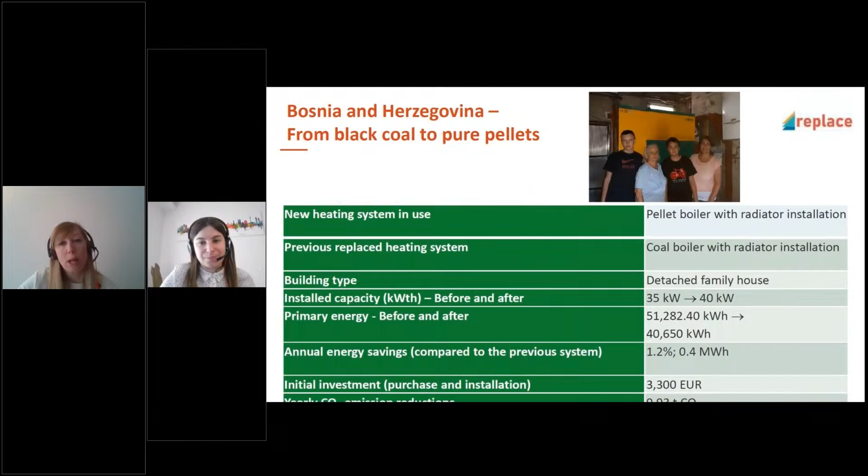More recently, BuildUp has opened the opportunity to distinguished experts in the field to share their knowledge in front of our cameras in our BuildUp Expert Talks.

The BuildUp portal shares daily the most relevant events in the field of energy efficiency and renewable energy, but we also participate actively in many European events around the year, such as EPB Center and REHVA conferences, H2020 DRIVE and construction events, Covenant of Mayors, and so on, with the aim of further disseminating the results and helping to create high-quality media content. The BuildUp portal is updated daily, reaching around 120 new items each month, including news, events, publications, articles, video content, and many more content.

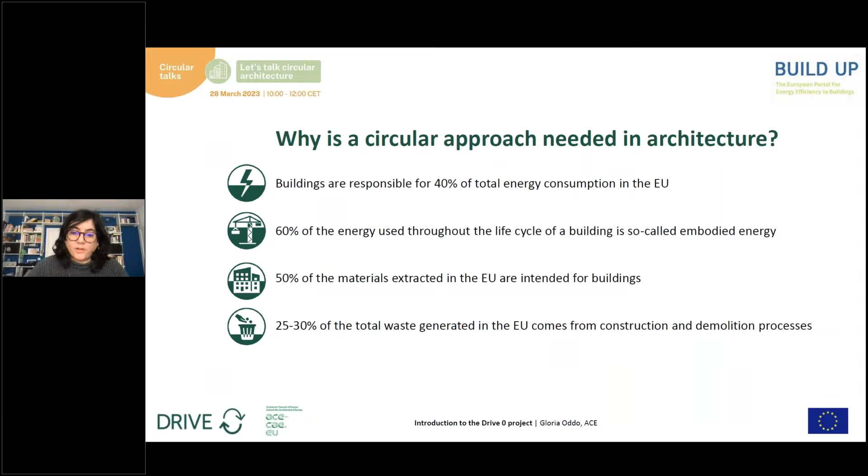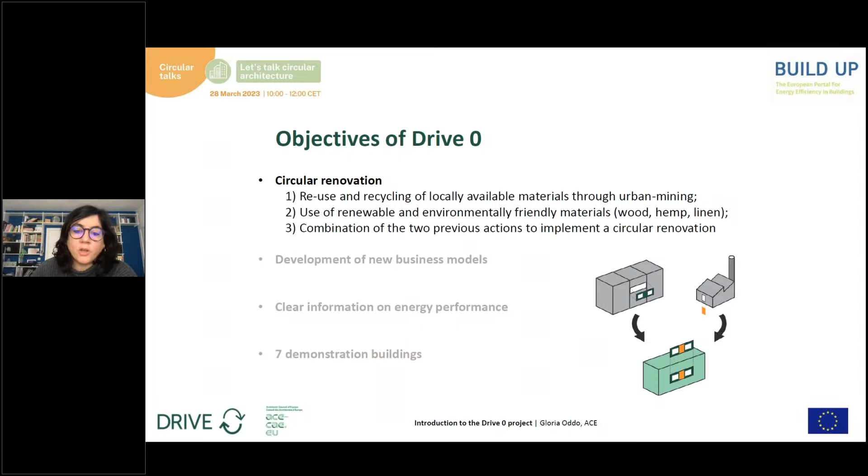Objectives of Drive Zero: first is circular renovation of buildings, meaning we reuse or recycle local available materials through urban mining. In parallel, there is the use of renewable and environmentally friendly materials. Then the two actions are combined to implement a circular renovation.

Development of new business models - we're going to see this later on in more detail with my colleague, Professor Elettra Agliardi from the University of Bologna.

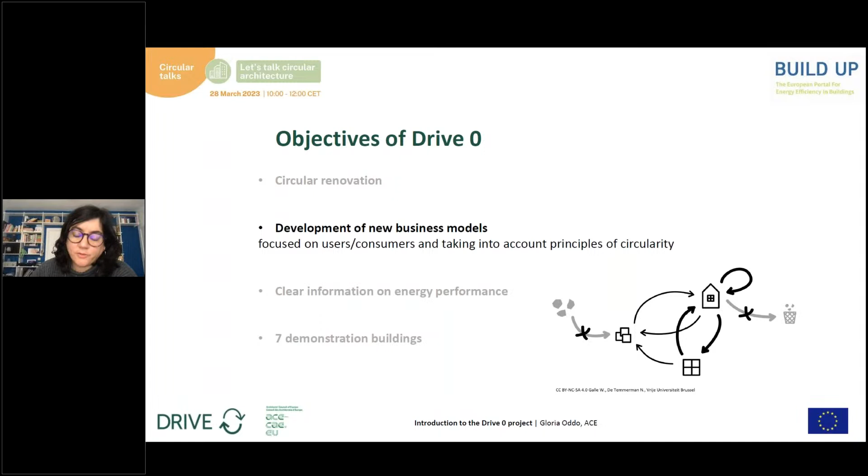Clear information on energy performance, because once the circular renovation has taken place, we need to transmit this information to the users, the occupants of the building themselves. The buildings are also an objective of the project, and they are all located in the 7 pilot countries of Drive Zero: Estonia, Greece, Ireland, Italy, the Netherlands, Slovenia, and Spain.

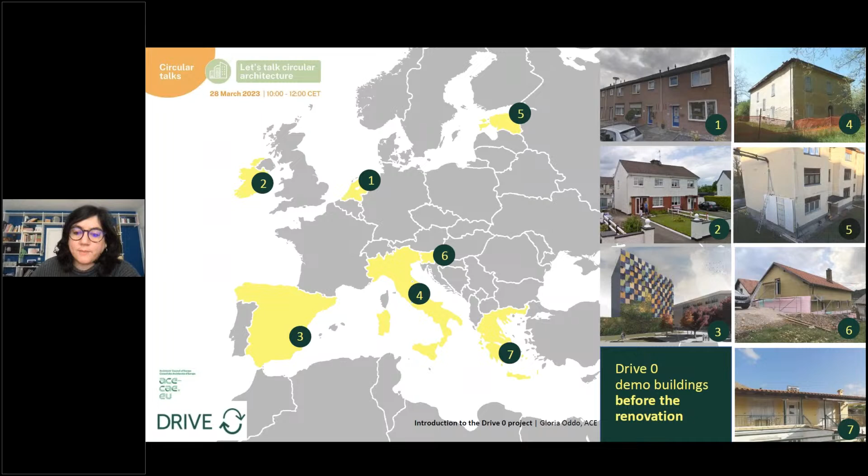This is how the buildings look before the renovation. As a consortium, we tried to pick buildings that represent a frequent typology in their own country. This was meant to ensure replicability of the technologies and of the research conducted in Drive Zero.

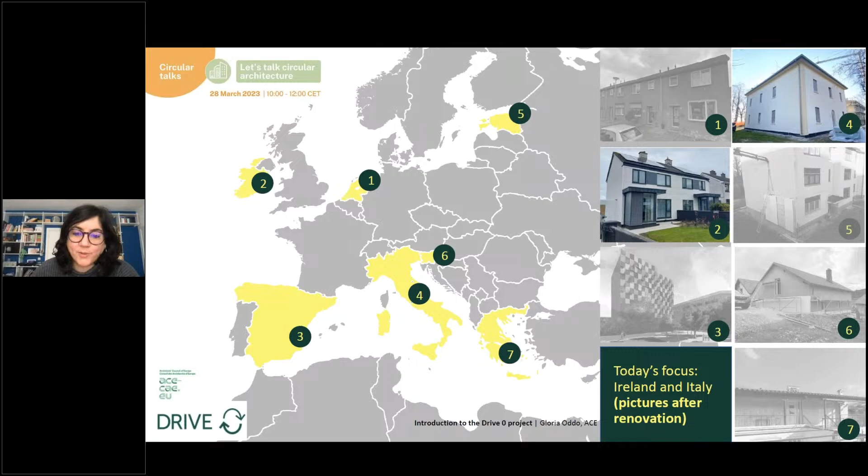Today's focus will be on Ireland, number 2, and Italy. Spoiler alert - this is how it looks already after the renovation. But my colleagues will explain to you more in detail the renovation process.

What about the other demos? They will be presented in the next webinars. As Julia said, this is the first of 3 webinars. The next one will be co-organized by University of Bologna and Housing Europe, and will focus on and be addressed to social housing providers, but of course everybody is welcome to join. We're going to present there the Dutch and the Estonian buildings.

More information will be available soon, but you can still check our website on Drive Zero. The third and last webinar of this series is co-organized by University of Bologna again, and the Property Owners Association. This will be on the 27th of April, where we're going to present the Spanish, Slovenian, and Greek demonstration buildings.

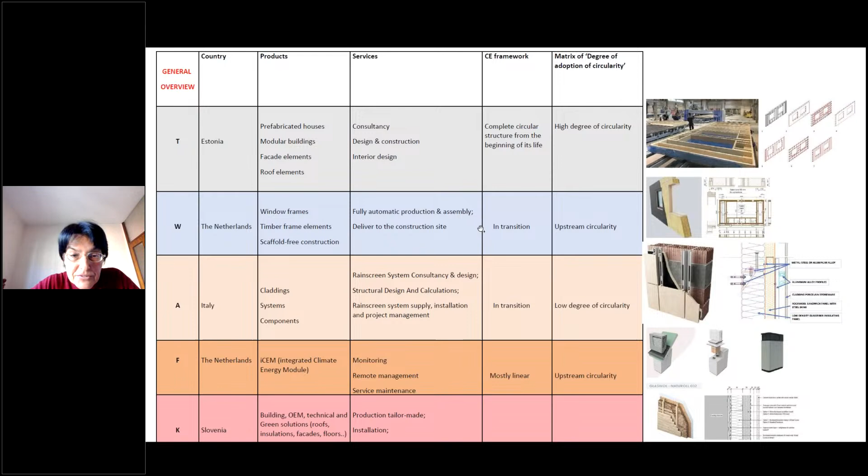Just to conclude briefly this part, the main takeaways of this preliminary part, which is relevant for most of the audience, which is architects or consultants in the eco-design process, is basically the following: you have to become aware in the design phase in particular, and therefore develop solutions which take into account the following aspects: how to introduce circular inputs, circular product service systems.

And how to exploit also the other important element of circularity in terms of lifetime extension, in terms of providing sharing platforms, and how to consider also the aspect related to products where value recovery is important, and therefore also how to use and, in particular, reuse waste and elaborate on this. And in particular also how to build new solutions in terms of shared ownership, and therefore considering more the use aspects, rather than the ownership aspect.

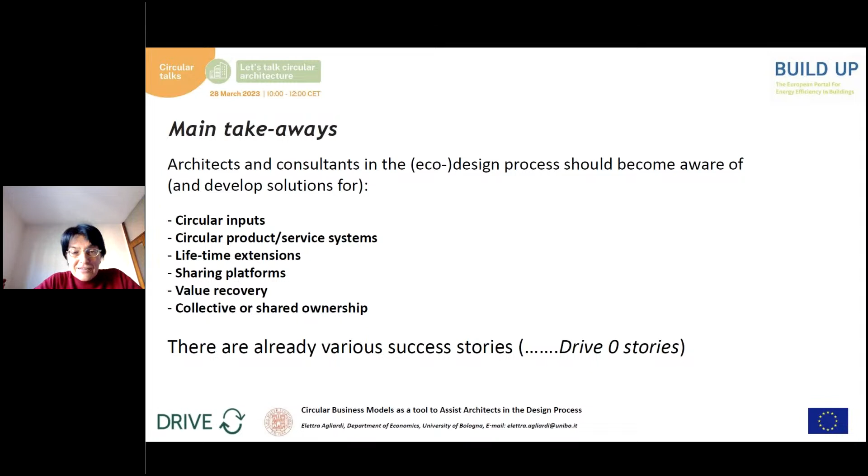And there are already various success stories, and of course we have successful stories also within Drive Zero. The Drive Zero successful stories would come immediately after my presentation. Thank you for your attention.

And let's go to Patrick. Daly, are you here? I'm here, yes, just waiting for when you want me to start. Yeah, go ahead, go ahead.

Great, hello everybody. So my name is Patrick Daly from Technological University Dublin, and I'm going to give you an overview of the Irish Demonstrator Project, which has just recently been completed.

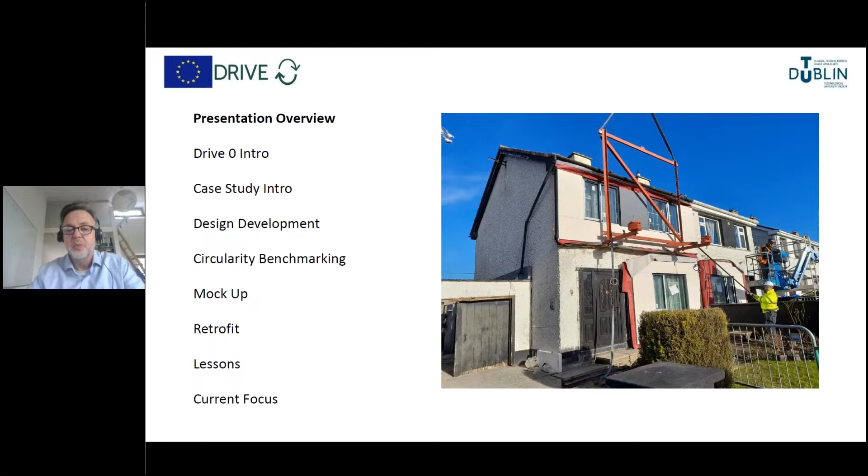So what I want to do is quickly skip through the Drive Zero intro since you've already been introduced to the project. I'll talk about the Irish case study, the design development, how circularity was benchmarked, the mock-up phase where we did preliminary testing of the circular wall panels, then go through the actual retrofit phase, and finish with a discussion of lessons learned.

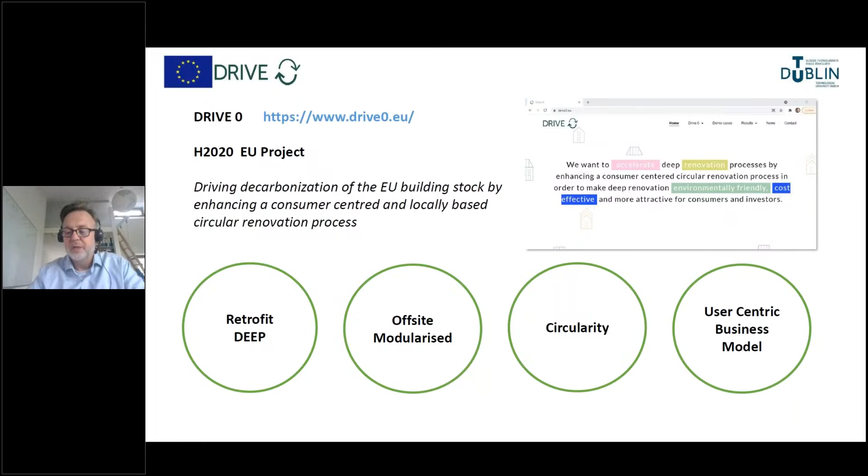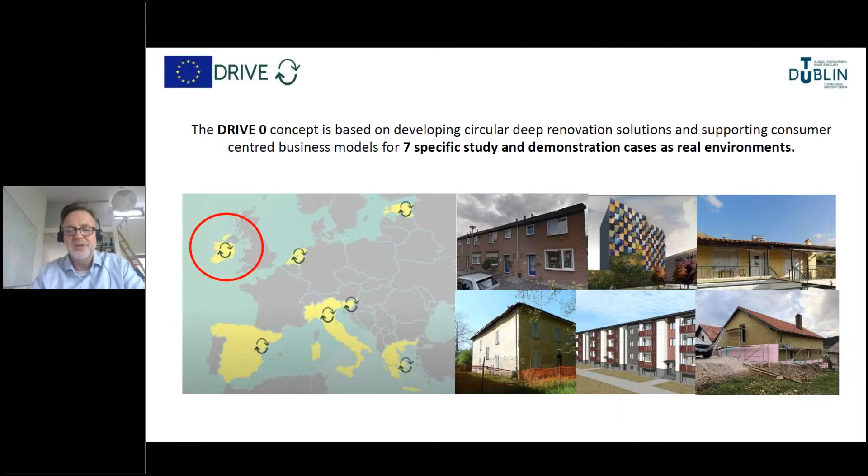Drive Zero is an EU project exploring circularity through modularized solutions. We are one of 7 consortium partners, the Irish partner on the western fringe of Europe. Our case study is in the center of Ireland: a 1970s construction, a typical semi-detached house, 3 bedrooms, in social housing owned by the local authority, or what you might call a municipality in Central Europe.

This is the demonstrator and our energy rating method. When originally constructed in the 1970s, it would have rated as a G, the lowest rating. It would have been heated with a solid fuel range cooker and an open fire, and it was uninsulated.

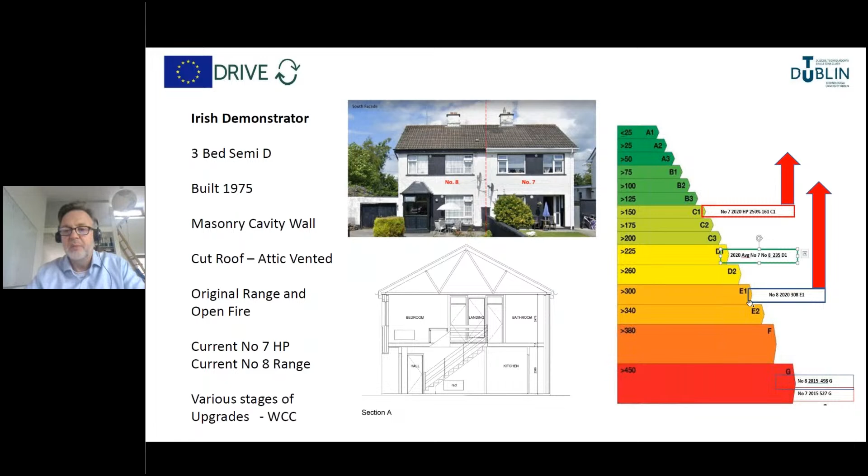In the interim before we started, the houses had some interventions. One property rated E1, with double glazing installed and some attic insulation. Another rated D1, with similar upgrades plus a modern heat pump fitted. So the houses were already partially retrofit, and we attempted to achieve a combined 65% improvement for both properties.

The measures we undertook included a fabric upgrade with a modularized system and a small extension, new heating systems, new energy efficient ventilation systems, renewable energy through photovoltaics, and new windows and doors. All combined to give us a 65% uplift.

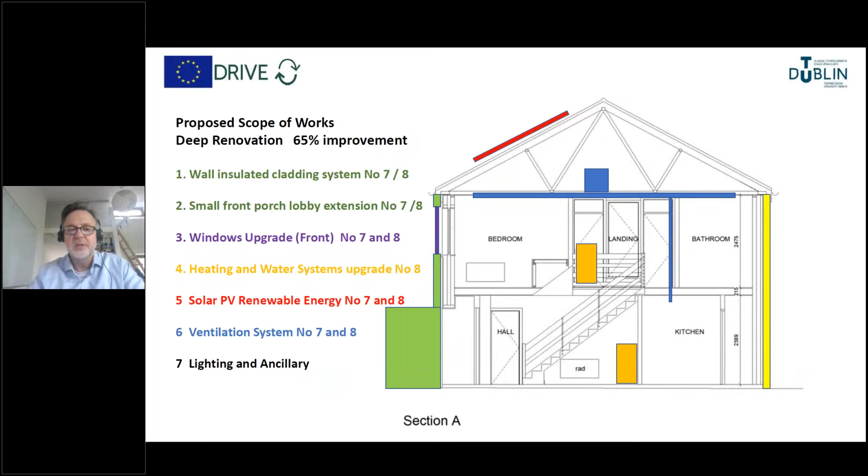Design concepts focused on how we would retrofit the wall facade. Due to the scale of the project and budget, we didn't feel it was feasible to do the roof, which had already been partially upgraded. So the main intervention in the demonstration was the modularized wall construction and the modularized circular extension pod.

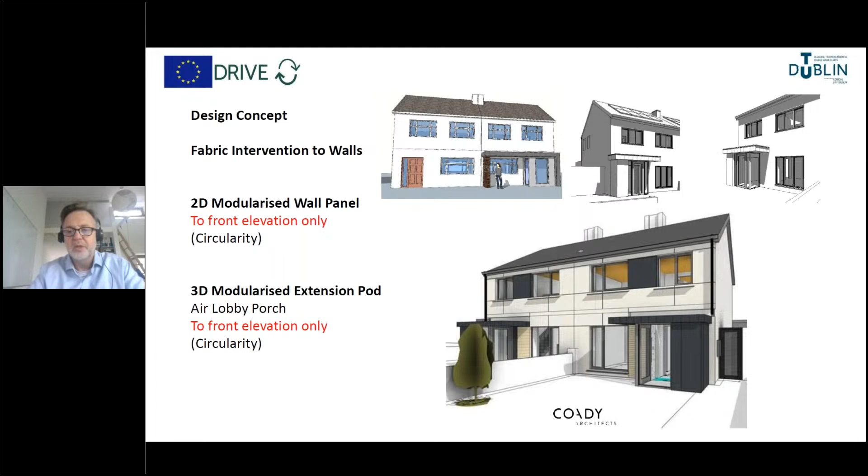Our partner was a conventional light gauge steel manufacturer with a system already used in construction in Ireland. We looked at how we could adapt this system into a wall cladding and modularized extension system, transitioning some of the plastic insulations to bio-based insulations, and looking at how we would connect and assemble the panels to the wall.

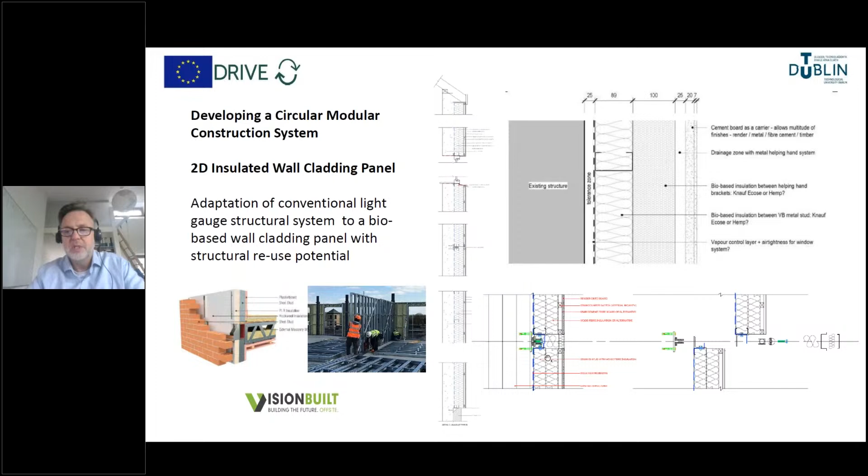These are some very early concept proposals and an initial concept build-up for the panel.

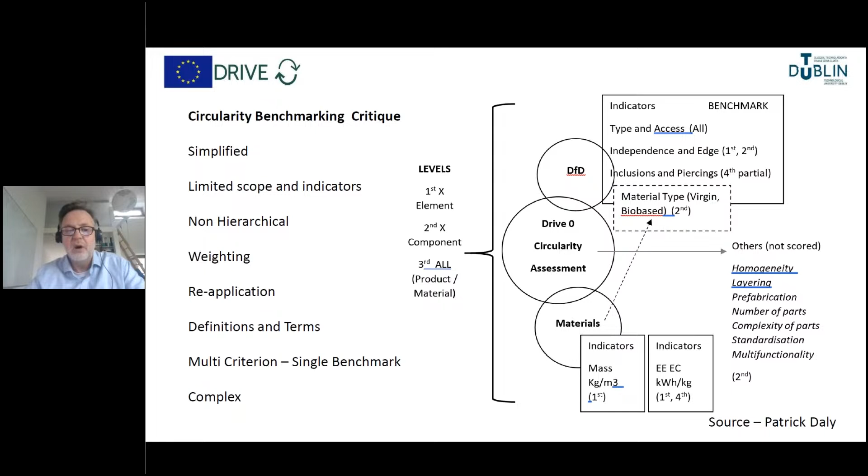A number of circularity assessments were done during the project, which were quite insightful and helped us develop the strategy. We also developed some criticisms of the simplification of that method, particularly that it wasn't always undertaken at different levels in the hierarchy. But it helped us develop our thinking about circularity, and in particular how important design for disassembly and material specification are to achieving circularity at construction level.

Out of that, we focused on a strategy where we would attempt to achieve full disassembly at all 3 levels in the building construction hierarchy.

At level 1, we wanted to ensure the prefabricated panels could be detached from the host walls in their entirety, so they could be reused in their entirety in another cladding or structural context, since they had structural capability, or be transported to a facility where they could be disassembled and disconnected in a structured environment.

At level 2, we wanted to ensure the main components making up the system - the wall panel, the window system, and the jointing sections - could all disconnect from each other and be reutilized with minimal impact.

At level 3, we wanted to ensure the panel system could be fully disassembled from all components and products and materials down to their base elements.

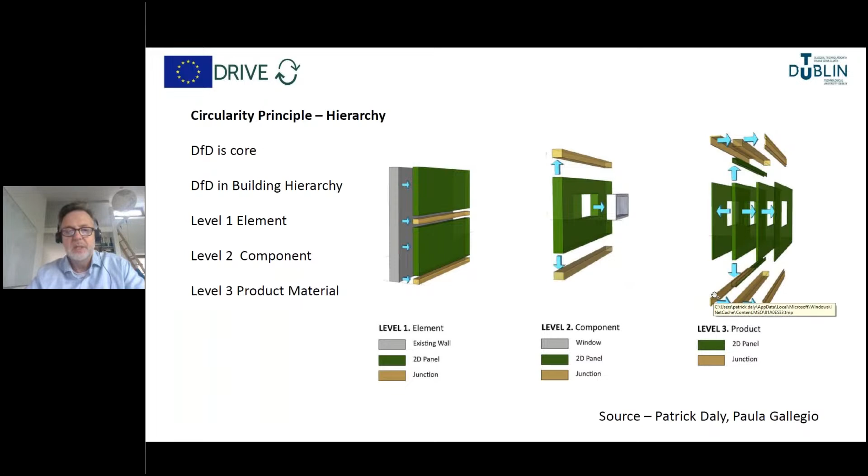Based on that strategy, we tried to implement the concept in a mock-up, and this is the mock-up design. It was partly testing architectural and technical factors, but we also undertook a full design for disassembly audit - not only installing the panels but taking some down, disaggregating them, then reassembling and reinstalling them. We went through the entire disassembly and reassembly process in the mock-up.

So the design of the mock-up was based on trying to make sure we were covering all the types of junctions that we may encounter in the retrofit, and quite advanced technical details were done at our first attempt.

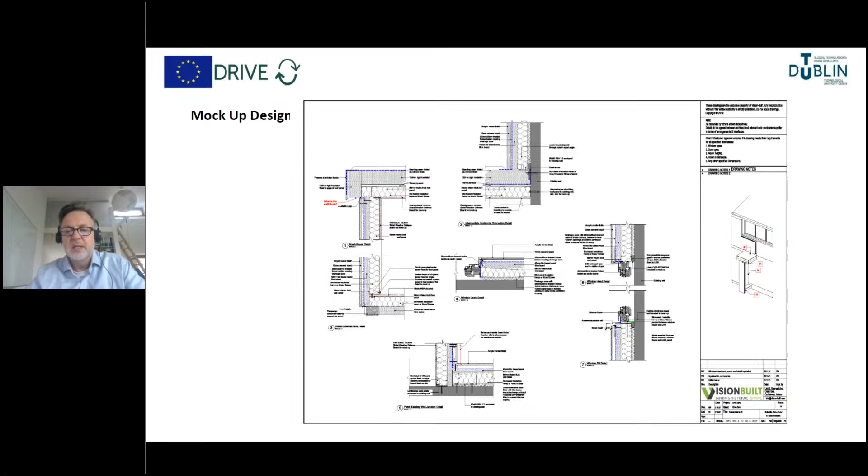Central to that was the concept of having an access zone that we could get in and access a simplified fixing method so that the panels could be lifted up and off their brackets. The panels technically have no direct fixings - they're held in place by gravity and restraint anchorage. This was to allow a very simple and rapid install, but also to facilitate a simple and rapid deinstallation. That was a key detail.

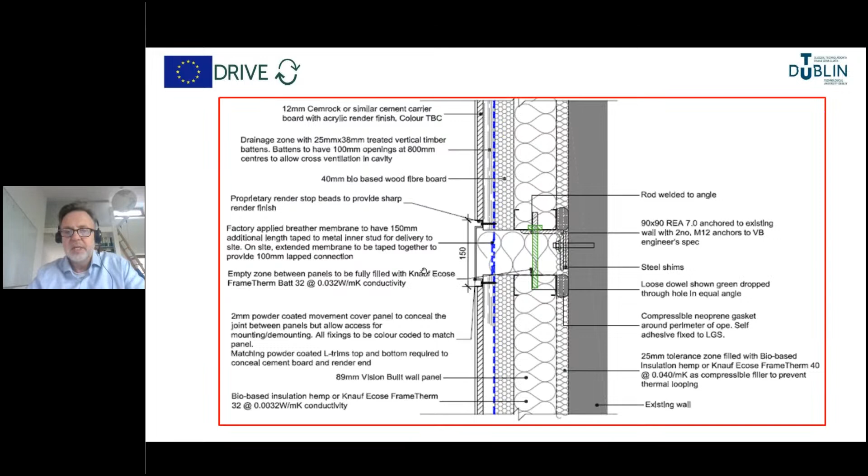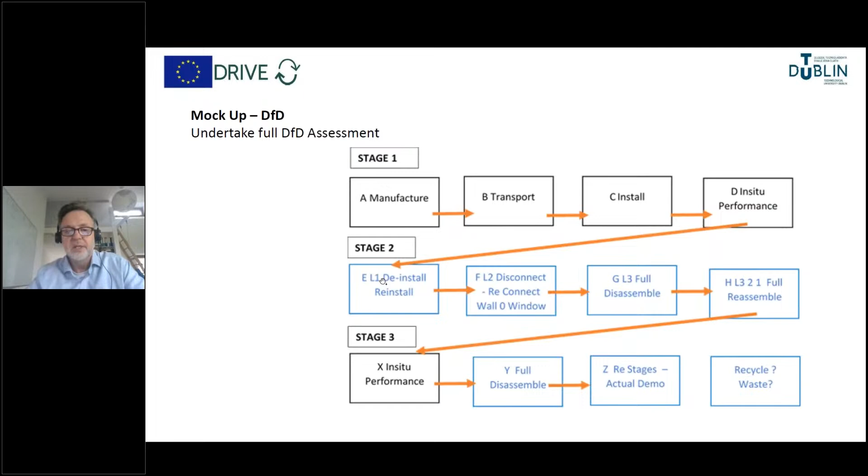That was tested in the mock-up, including not just the assembly, but the stages of disassembly study, shown here in blue. That was quite important and was fully documented and monitored. We assessed the amount of materials that were impacted and damaged, but actually that was very little. We did show that we were able to reconstruct the panels nearly in their entirety for reuse and reinstallation.

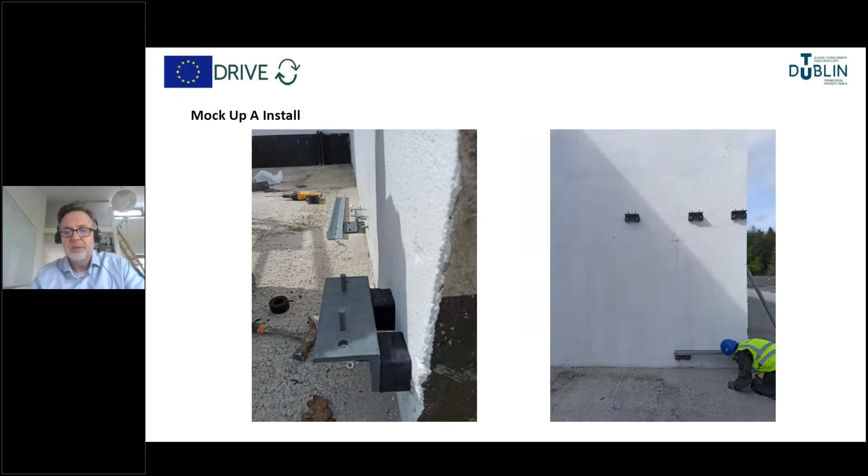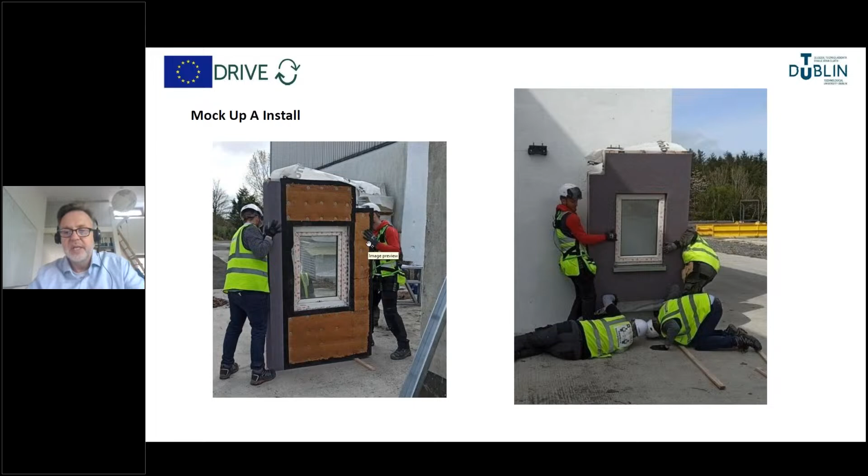So there's the panels being manufactured, and there's the bracketry being prepared, and then the panels going in place with a backing concept, which we then modified. The backing detail was to take into account undulations in the existing wall construction, and the 3 panels going in.

And then we had the roof and wall panel for the pod to go in. There were significant learnings from that, and the main one was that we needed more tolerance in the bracketry system to facilitate easier install, but also more accurate jointing and alignment of panels.

We also were critical of the render system we were using and really saw the need to move to a completely dry system. And also the backing solution was not working effectively, so we modified those.

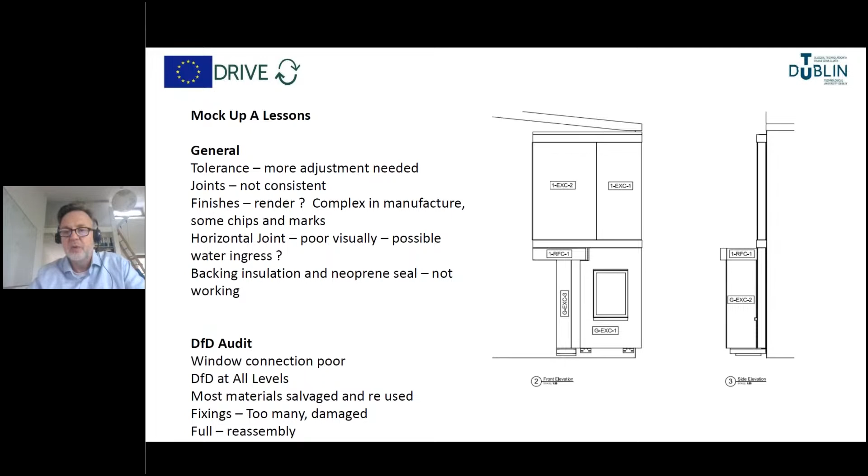And then we began to take some of those panels down and begin to undertake our full design for disassembly audit. So we disassembled and remanufactured some of the components.

A significant change was redesigning the bracketry, drawing from our colleagues in Estonia who had done a similar bracket system in the More Connect project. We introduced that concept to give us more tolerance in the design, and we changed to a full dry system.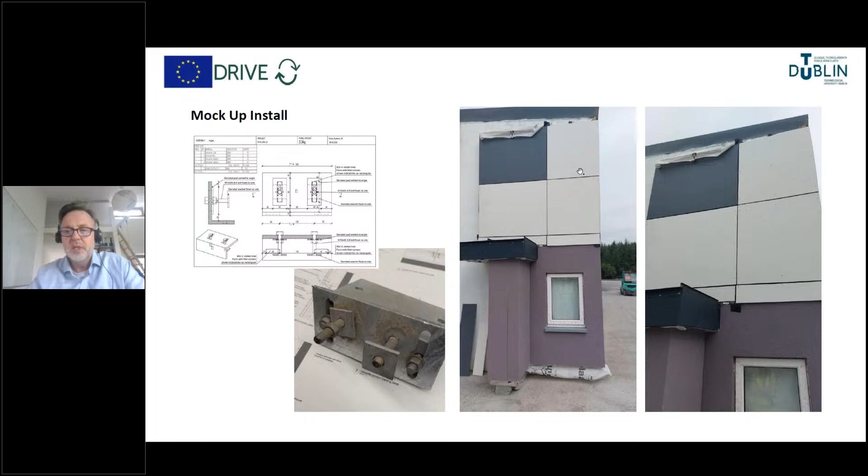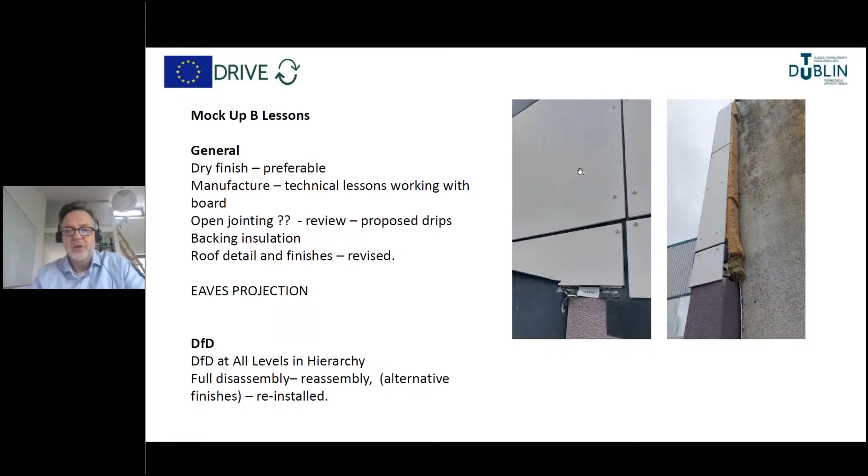And from that, we did some further adaptations and a further installation to look at the process of installing a larger panel system. So the mock-up was quite an essential process, and there was huge learning from that.

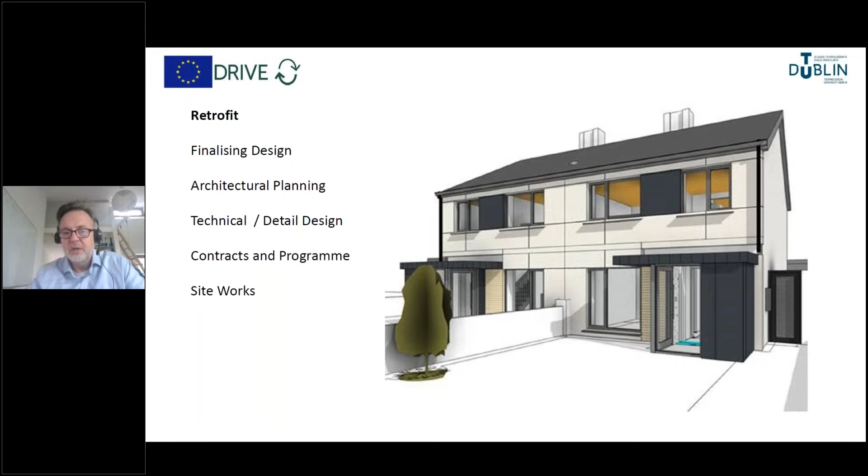Then we began to apply that in the final design. The final design involved developing the architectural design with a change in materials and discussing issues around planning. This was one of the concepts developed for that discussion. We also advanced the technical and detailed design with specification and detailing changes made from the mock-up, developing building contracts and program, and then moving into site works.

So we have some examples here from the final architectural drawings from the design. And then we move to site works. I'm going to go through the enabling works and then focus on the upgrade of the facade on the modular system.

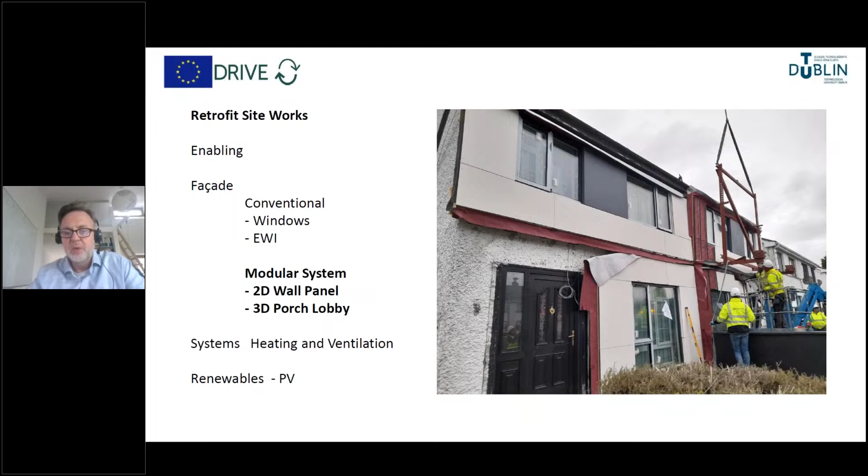Firstly, we have some enabling works - the facade, the modularized facade, has only been applied to the front of the properties. The rest of the building has been wrapped in external wall insulation.

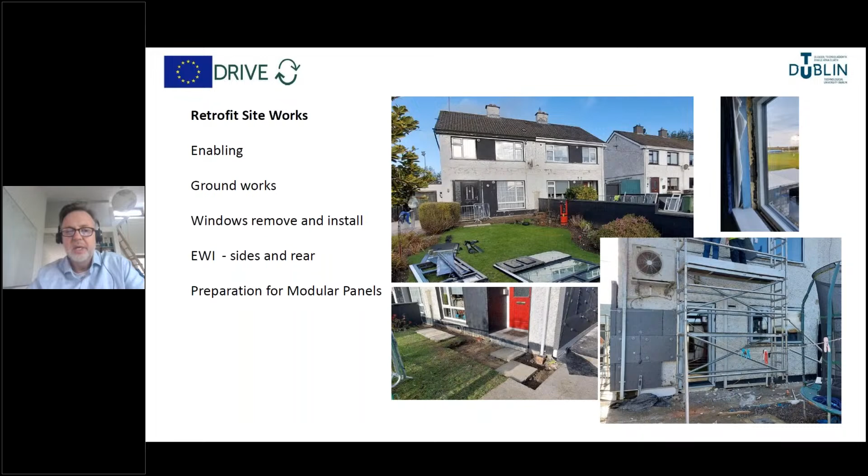Here the building is being prepared as the windows are being removed from the rear. The bracketry is going in for the panels. We have some ground screws going in to take the extension so that we could avoid concrete foundations. There's the brackets now being lined up and installed.

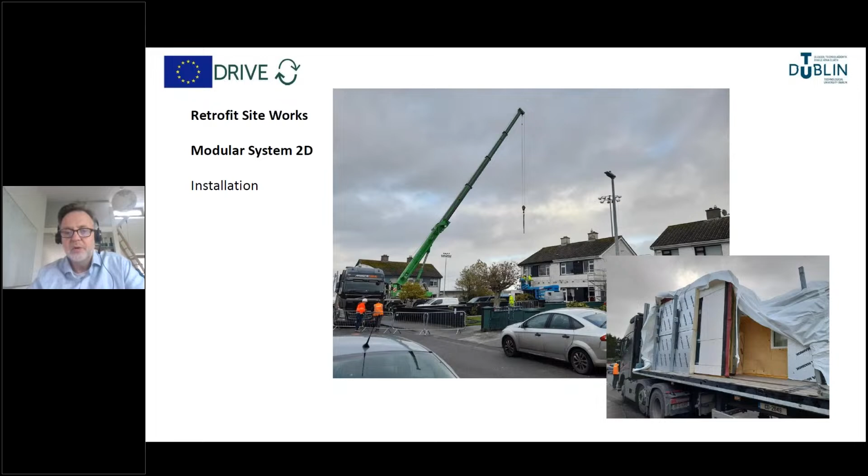And then we have the delivery of the first panels and the crane, with part of the road having to be blocked off to facilitate the delivery and the craneage.

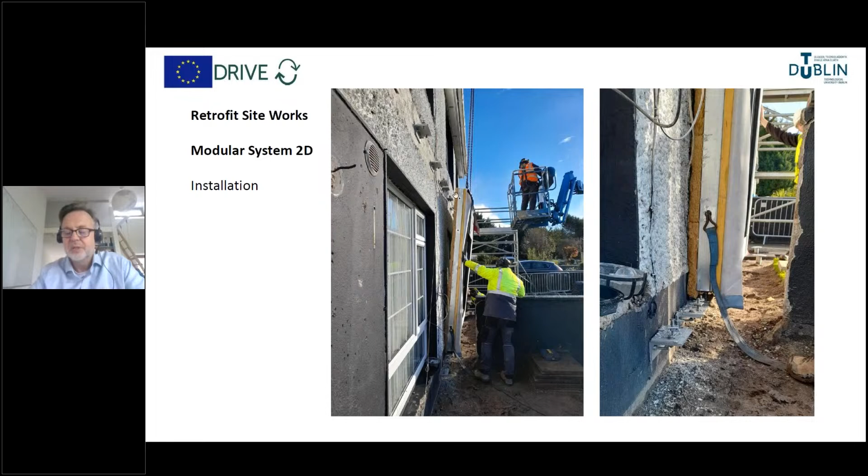There's the first panel being lifted off and dropped onto the brackets, being leveled up and going into place. You can see it being dropped in, and the brackets on the right show how it sits onto them. It's then restrained from the top bracket with a clip put in to restrain it in place. That's the first panel installed, sitting on the adjustable brackets. You can see the brackets can go up and down and can go in the horizontal plane in and out to give some tolerance.

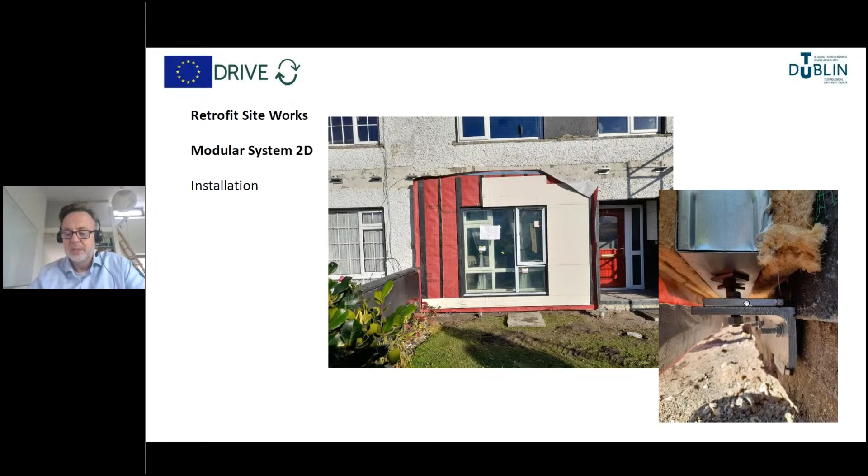Second panel going in, fully finished, windows installed. Upper panels going in. These had to go in under an eaves projection, so a counterbalance system was designed so that they could be put in vertically and get in under the projection.

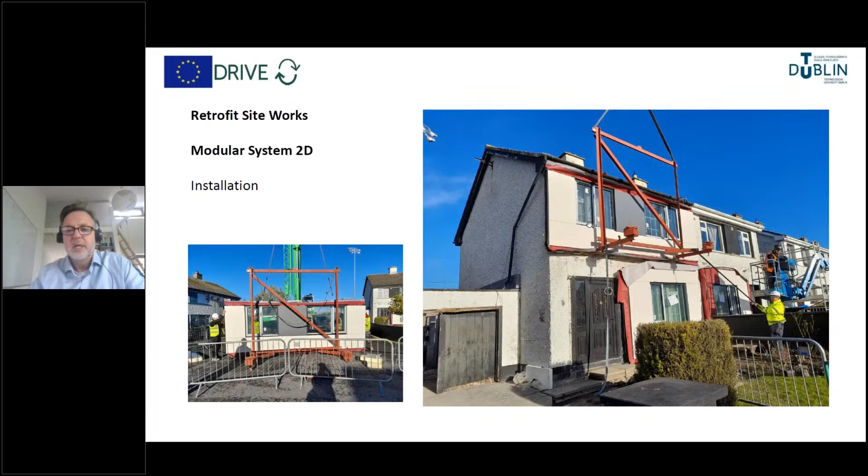And then we are doing some modifications to the eaves to get ventilation into the roof, because the panels were affecting the original airflow into the roof.

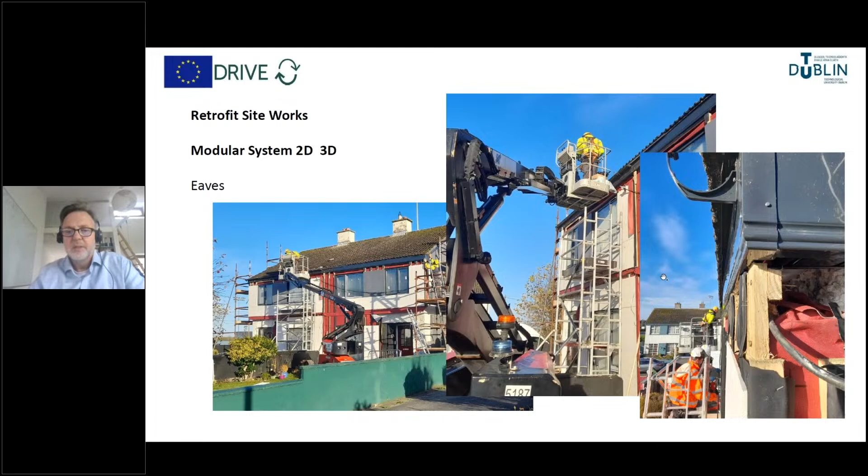And then the internal windows are removed, showing the new external windows already in place, and they need to be lined out and insulated and made airtight.

Then the porch floor is going on top of the ground screws. The wall panels going in for that.

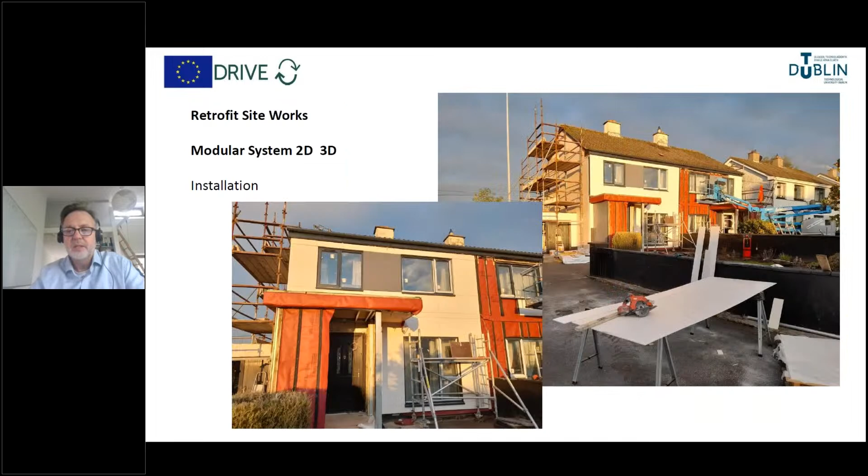Walls and roof going in of the extension, the roofing finish on the extension, and wrapping the external modularized system detailed to meet the external wall insulation system.

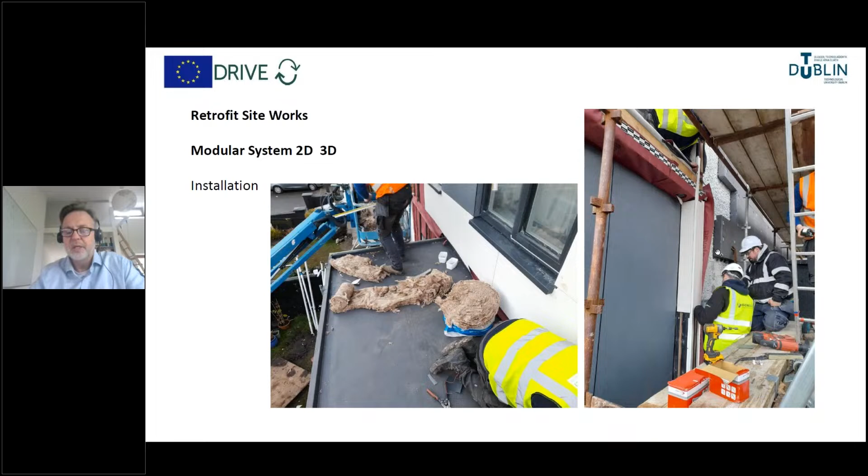Then the porch glazing coming with doors and glazing for the extension and internal finishing.

And of course, all that's happening on the outside, but there was reasonable impact internally, particularly all the windows and doors had to be relined. So there was impact in every room, and there was some disturbance to the tenants.

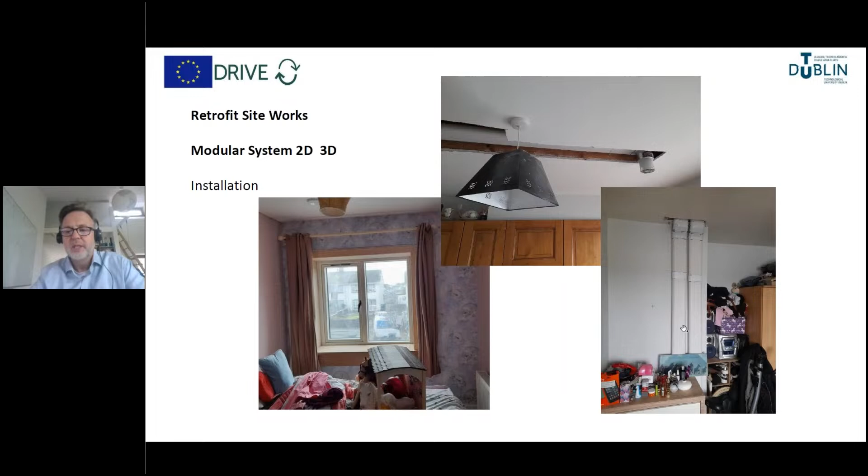And also we were installing new ventilation systems, and those routes needed to be worked within the existing fabric. So that meant some interference in a number of rooms, which was a challenge for the tenants.

Then we're coming to begin to finish out the modular system, and the external render system is being finished as well.

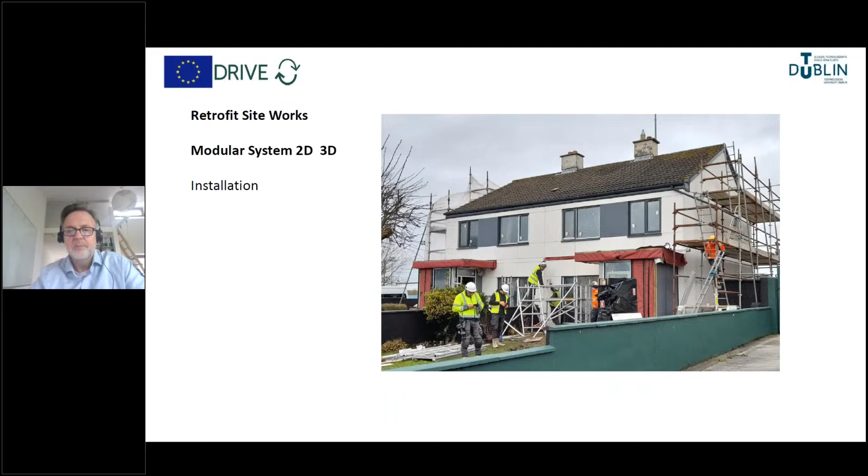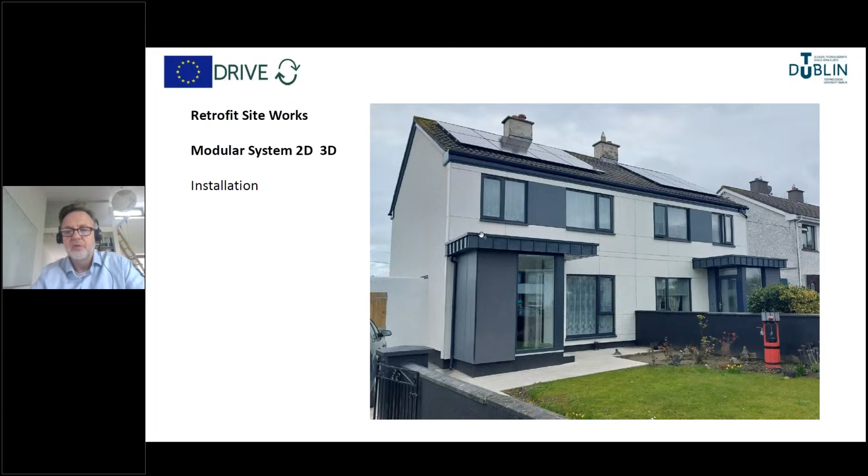And we're coming toward completion then with the PV system being installed. And then we come to completion just a few weeks ago, with all the groundworks being finished outside and the roofing being finished on the modularized system.

So the main lessons learned from that were in relation to the retrofit works. Obviously, it was quite unique because it was a research project. So actually the team involved was quite large and complex for such a small project. And I think that had communication problems because you would not normally have such a large team involved in a small retrofit project.

We were surprised with the amount of impact on the tenants. So although we had a lot of external plug and play modularized solutions, there were still significant impacts on the tenants who were in situ and living in the properties during the works.

And that was particularly access to the property because of the porch extension, and all the windows having to be lined out. So every room that had windows and doors had some work and tradesmen.

The scaffold for the external wall insulation caused access issues to the rear of the buildings. And some of the services installations meant electrical cabling and vents and ductwork being installed, which also had impacts.

So because of the proximity to Christmas, that became quite a frustration to the tenants and a problem that we had to manage. Also, for a small project, the availability of trades was quite difficult. Getting tradespeople to be involved in a minor project like this, for small piecemeal works, was quite difficult.

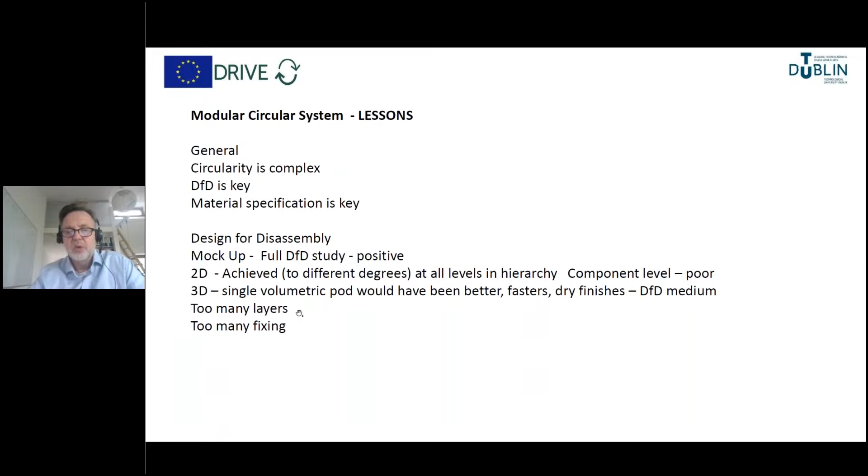And in retrospect, we would see that there are probably too many layers in the system, which increased the number of fixings and increased not only cost, but complexity. So that we feel would need to be simplified.

And going forward then, we would feel that for the Drive Zero project, we probably needed a more comprehensive and diverse partner team at the beginning. So we would look to do it again with a wider team base and a more significant budget and a more advanced circularity system assessment method.

Going forward, we would love to be involved in follow-on research on circularity, particularly in design for disassembly and modularity. We see that there's huge opportunity for developing modularized circular solutions for the upgrade of facades and building envelopes.

We would like to be involved and see the need for a larger scale demonstration project where we can see some of the financial benefits of scale and more holistic whole building upgrade rather than just partial, and both domestic and commercial. We would think that we would need contractors and specialist suppliers engaged in the project from the start.

Because it's also about a circular process, and circularity needs to be in the whole supply chain. So there are some of the lessons, the overarching lessons that we've drawn out from the project.

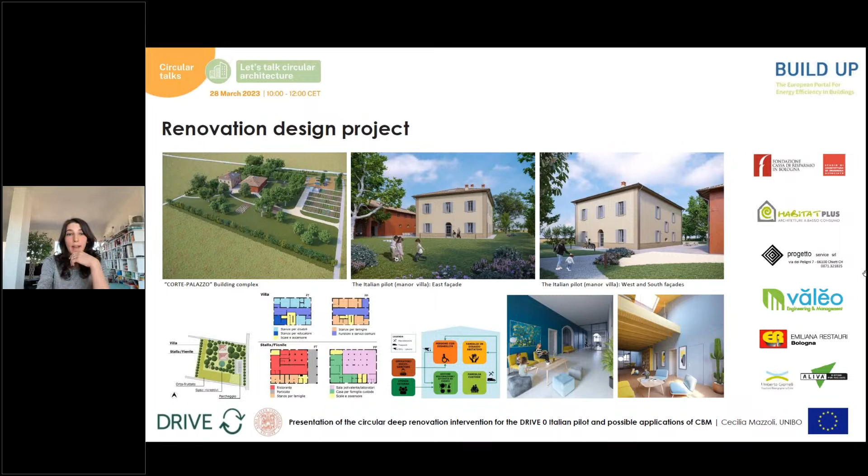The buildings are not subjected to an architectural constraint, but just to a historical documentary constraint. So the regulations in force in Italy do not allow for deep intervention on the facades, but just on the roof.

On the contrary, on the facades and on all the other architectural elements, it is possible to just softly intervene. However, it is always mandatory to realize interventions that preserve the typological construction character of the buildings as a testimony documentary building. This issue represents a very important boundary condition to be considered for the design of all the renovation processes to be developed.

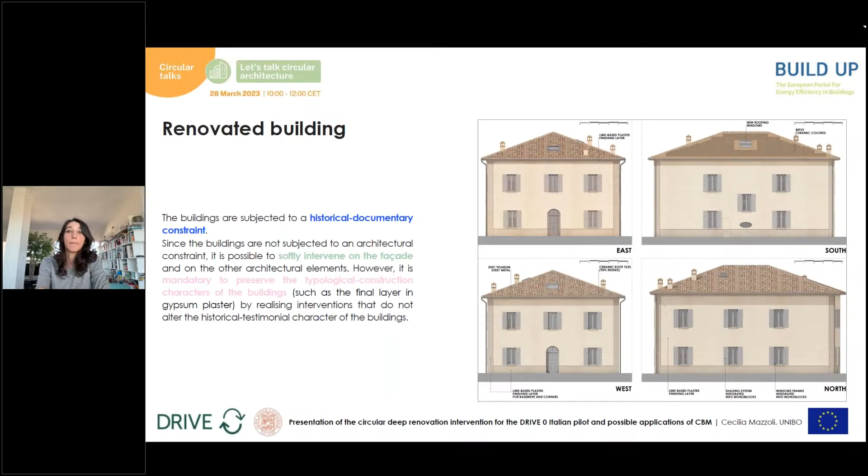The construction began in July 2021, and the end of the works is scheduled for mid 2023.

In this slide, we can see the specific circular actions implemented. First of all, we have the reuse of existing materials, such as 92% of the original roof ceramic tiles on the new roof, and also the reuse of crushed original solid bricks for paving substrates. Then we have the installation of building integrated photovoltaic panels integrated in the south-oriented pitch of the roof.

Then we have, of course, the energy refurbishment of facades. That is one of the main important interventions, through two different systems, one traditional and the other more innovative, designed by the Italian factory Aliva, which is a partner of the DRIVE Zero consortium.

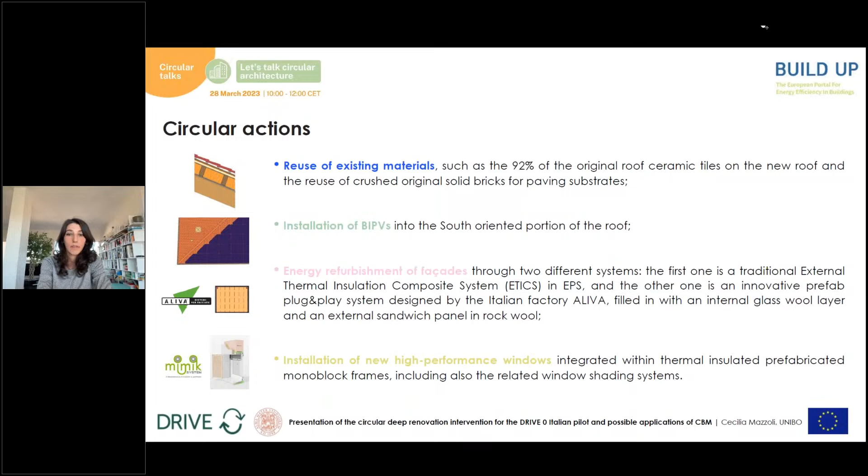And last but not least, the installation of new high-performance windows integrated within thermally insulated prefabricated monoblock frames, which also include the related window shading system. So these are basically the most important actions.

Regarding the refurbishment of the building envelope, here we can see the two different systems adopted. For the south and east-oriented facades, we used a traditional external thermal insulation composite system called ETICS in EPS. This was fixed and glued to the existing facade for a total thickness of 20 centimeters.

On the north and west-oriented facades, an innovative technology designed by Aliva has been implemented. It consists of plug-and-play prefab panels filled with an internal glass wool layer and an external sandwich panel in rock wool, for a total thickness of 20 centimeters, equal to that of the ETICS used on the other facades.

The implementation of two different solutions, allowing to achieve the same value of thermal transmittance according to the legislation in force, is aimed at testing the technical feasibility and energy performance of the two solutions.

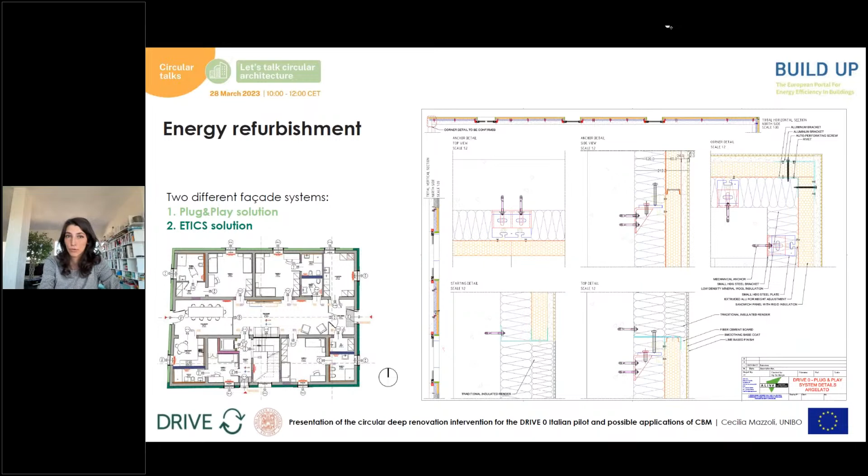Here we can see the specific materials and products used for the plug-and-play solution. For the external finishing, we used a fiber cement board that was used as a waterproof layer and as a base for the finishing layer in lime plaster, as imposed by the historical constraint.

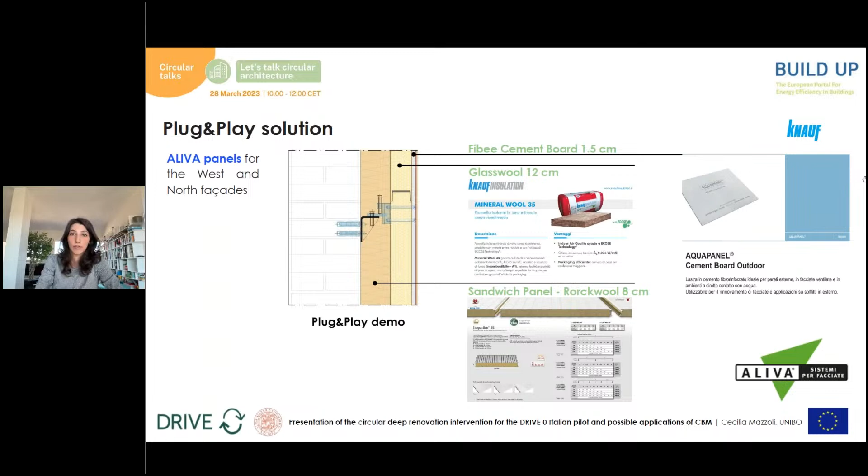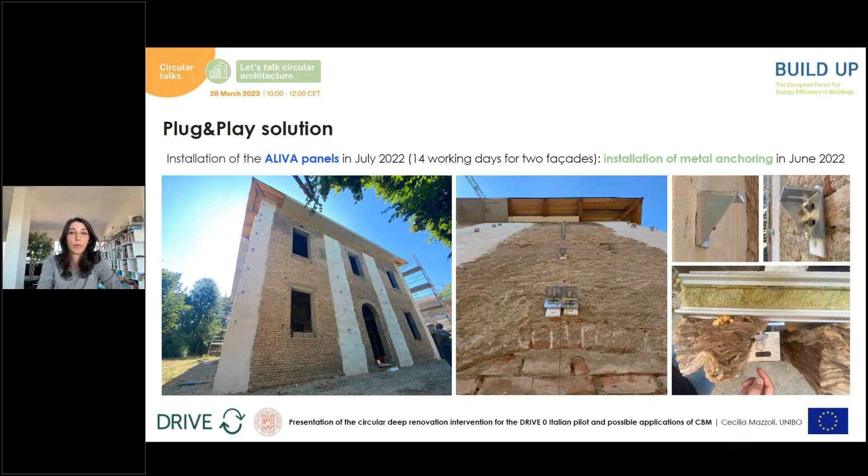Then we had the implementation of these large format panels designed and produced by Aliva, which is completely innovative in the field of protected heritage. So this was the main, the most important challenge for our pilot demonstrators.

The installation took 14 working days for the two facades, so we can say that it has been proven that it is a very fast assembly system.

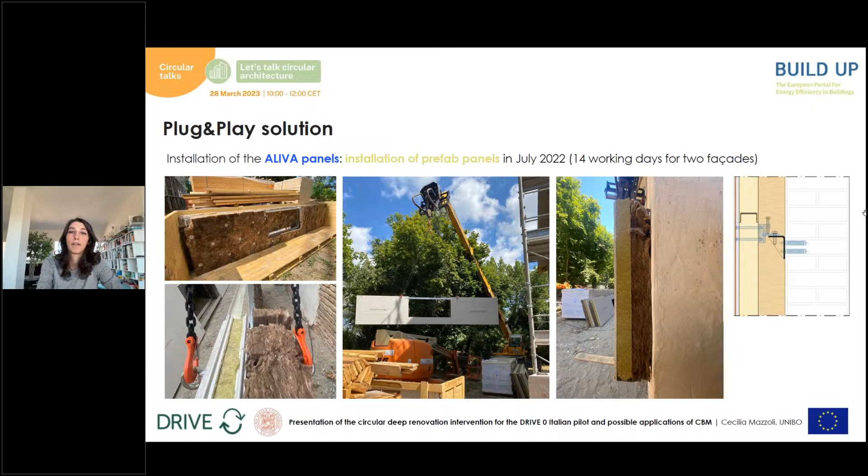In correspondence of windows, the prefab monoblocks were positioned and fixed through the use of punctual anchors in steel. And then the voids have been filled with EPS in order to solve the thermal bridge.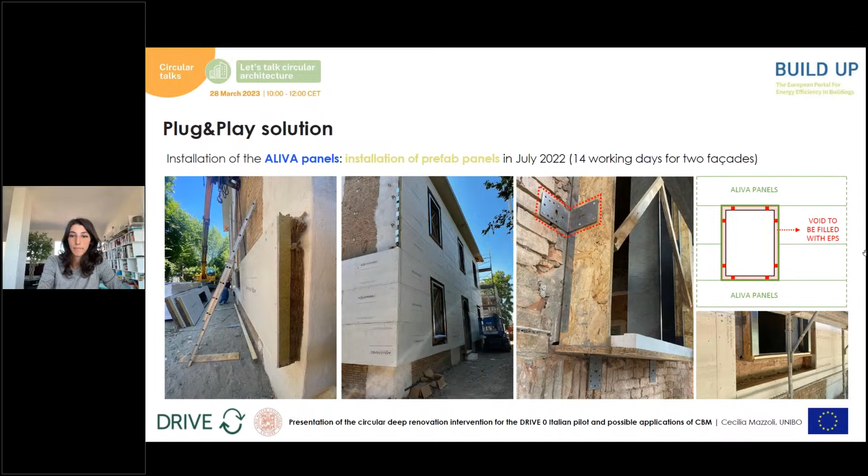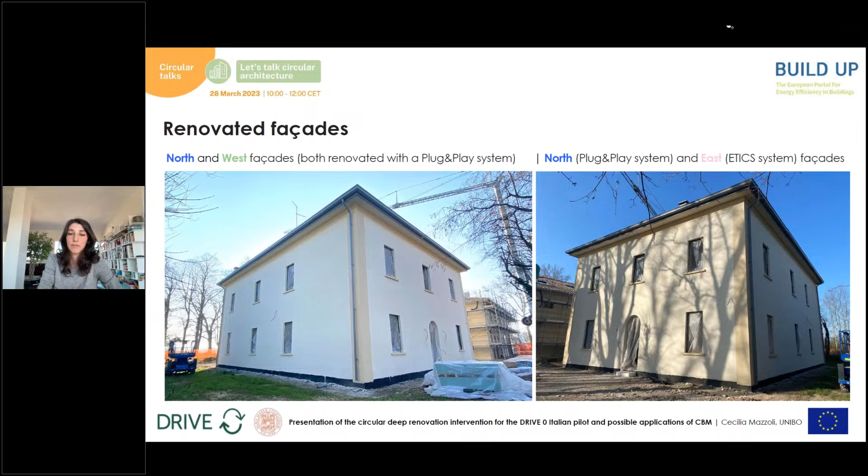So this is the final result that Gloria already showed you. If you compare the different facades that have been refurbished through the two different systems, you can notice that there is no noticeable difference between the two refurbished systems. So this result was a success for us.

As anticipated, the roof was totally remanufactured through the original system in wooden beams and joists. So here you can see the different phases of the remanufacturing of the roof that were monitored through time-lapse.

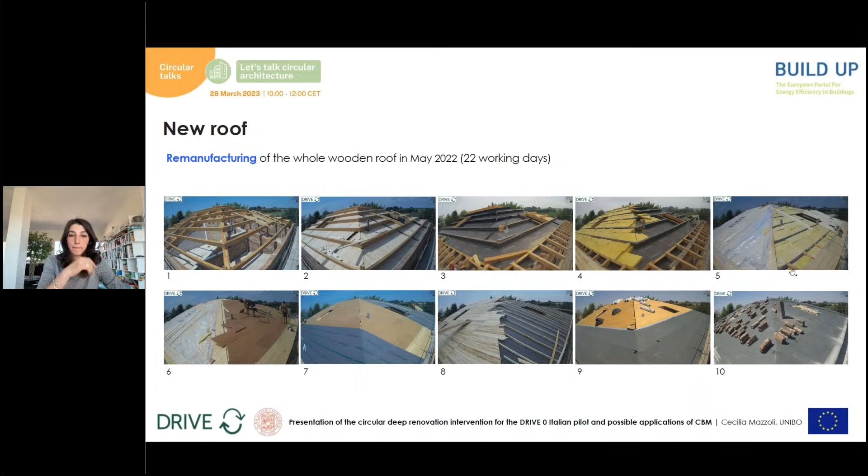And then in particular, we can see the two specific circular actions implemented for it, related to the reuse of the original ceramic roof tiles, 92%, and the installation of building integrated photovoltaic panels in the south-oriented pitch of the roof.

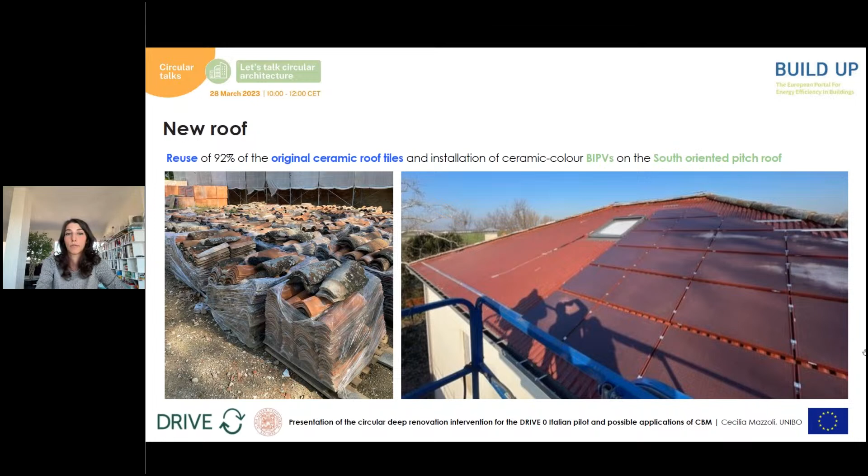So regarding the analysis, Unibo conducted several analyses of the circularity level of the intervention for the four different facade solutions. We considered the plug-and-play and the ETICS solutions in the demo version, the ones that were physically adopted in the demonstrators.

And then we also studied the corresponding solutions in the original version, which was more circular finally.

The analysis considered different values related to different factors, basically the embodied energy and embodied carbon values, circularity indicators such as design for disassembly, materials origin, and the reusability of products and components used in the different solutions, and also the percentage of waste and reusable materials at end of life.

Among the two plug-and-play solutions, the original one, including metallic substructure and anchors and also cladding in recyclable ceramic tiles, seems to be more circular than the other one, imposed by the historical documentary constraint with its non-recyclable original lime plaster finishing layer.

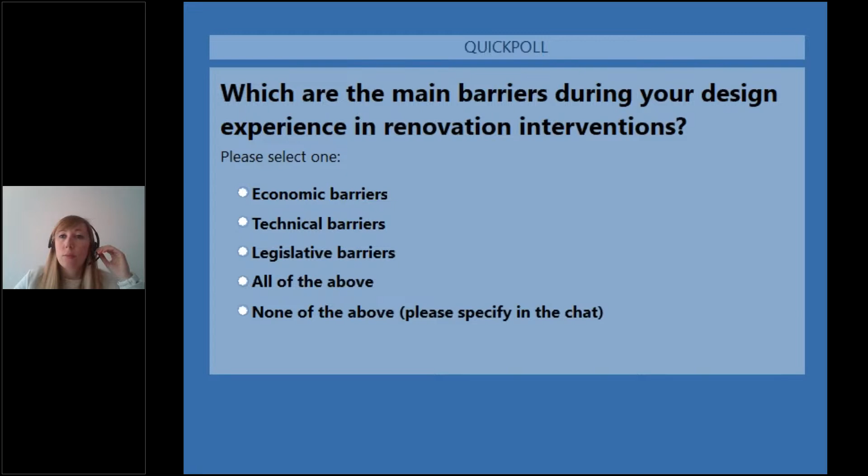Okay, let's see the results. So mainly economic barriers, but also 33% say all of the above. So technical and legislative barriers have also been found.

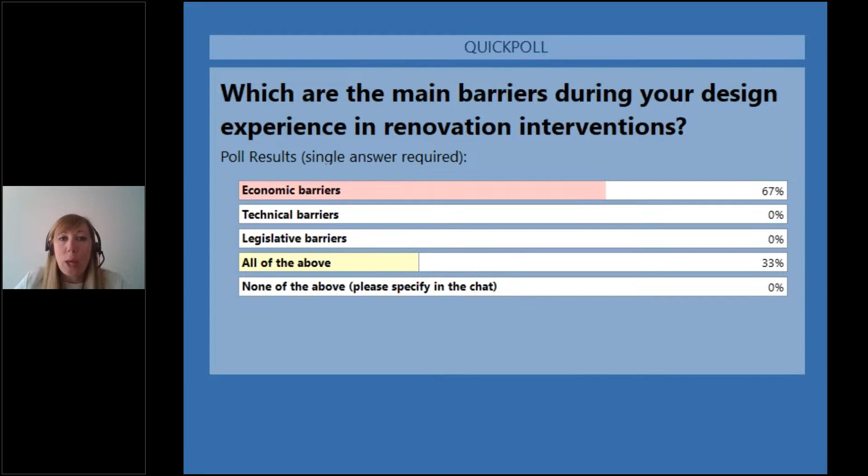Okay, second question. Have you ever thought about integrating circular principles in your architectural practice? Select one: yes, I'm already doing it; yes, I will consider it; no.

Let's see the results. Okay, most of you are already doing it.

Third question. How often do you adopt a circular approach during the three standard phases—acquisition, use, disposal—in your renovation project? Select one: regularly, occasionally, rarely, never.

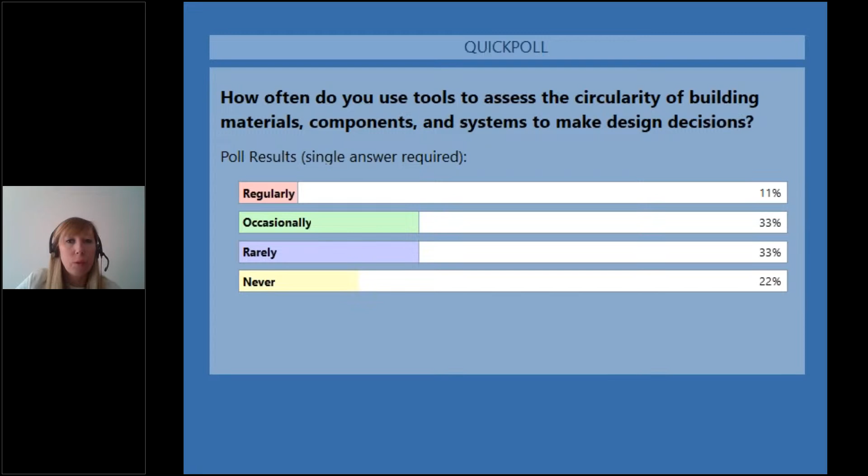Okay, another question. How often do you design with secondary, reused, or recycled construction products in your projects? Select one: regularly, occasionally, rarely, or never.

Let's see the answers. Okay, most of you never. 36% rarely, 18% occasionally. So it's not widely, they are not widely used.

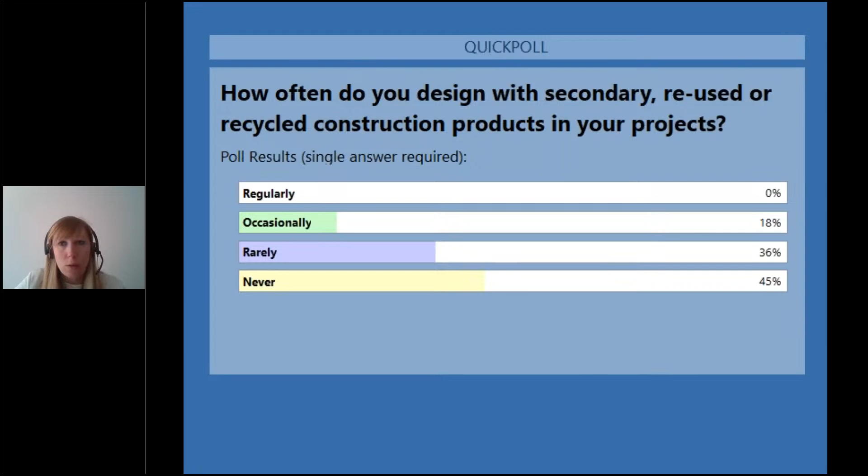Another question. How often does your design process take into account deconstruction factors? Select one: regularly, occasionally, rarely, or never.

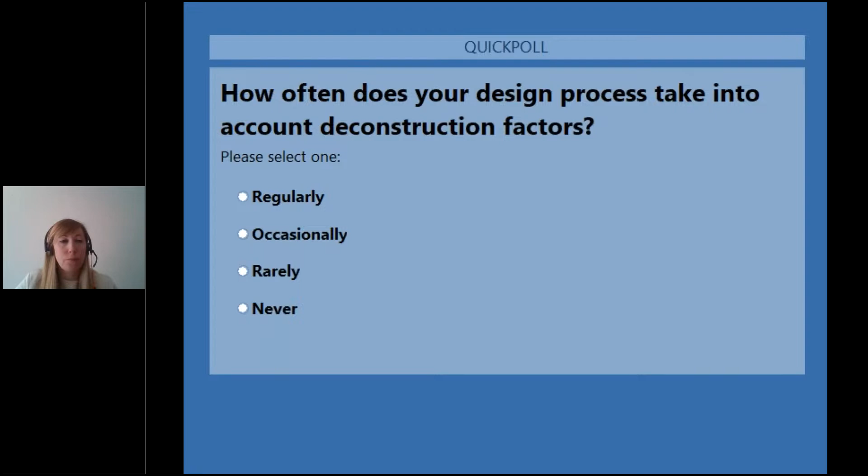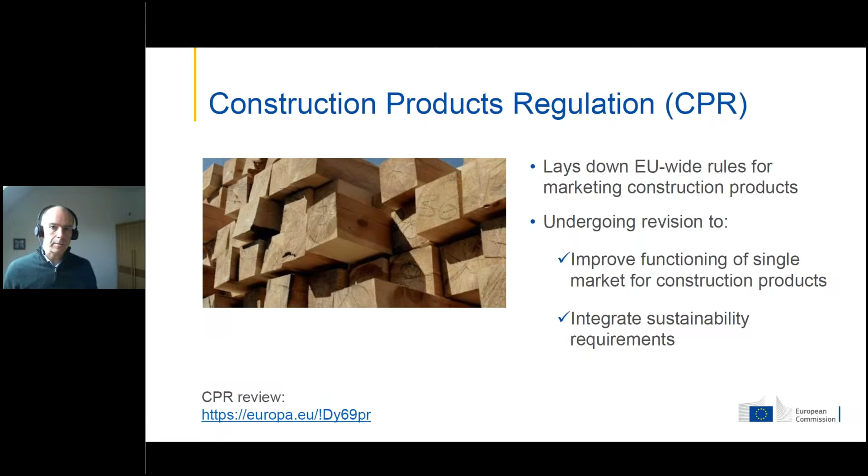Now, the single piece of legislation under revision that is probably going to make more of a difference than any other for circular construction is the Construction Products Regulation. It already exists and lays down the rules for marketing of construction products and the CE marking, but it's undergoing revision for two main reasons. One, it's not functioning as well as it should in the single market, which faces barriers that need to be overcome. Two, we need to better integrate sustainability requirements into construction products in light of the EU Green Deal, the move to a circular economy, the climate emergency, and all these actions.

Specifically on how the Construction Products Regulation is going to facilitate circularity, these are some of the articles in the Commission's proposal and what they would do for circularity. A lot of the barriers discussed until now in this event would hopefully be overcome with some of these measures, making it easier and creating a level playing field for secondary products: for reuse and recycling, for taking back over-ordered materials and giving them a second life, and a facility for member states to establish schemes at their level. So there's really a lot going on there.

Another element would be mandatory digital data on construction products. There would be a digital product passport, and mandatory carbon footprint data for every construction product going on the market. Optionally, the Commission could introduce requirements for other environmental data, such as recycled content, for specific products where it makes sense, and other environmental criteria related to pollution or hazardous materials. So the revision of the regulation would empower the Commission to introduce some of these requirements through future delegated acts and implementing acts linked to the regulation.

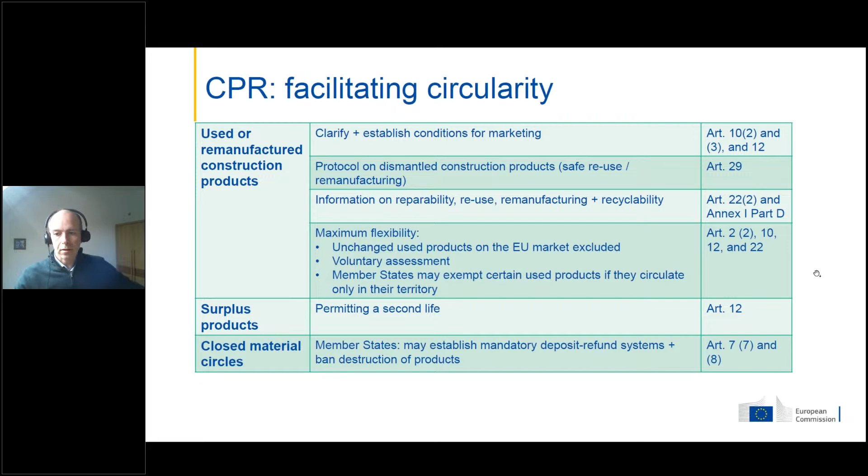Let's go to the next one. We have a study that's ongoing, finishing in a couple of months' time, trying to understand better what the industry is doing when it comes to circular approaches. At the moment we have certain statistics, like the Eurostat waste statistic, but they don't really tell us in detail what the industry is doing. So this study is specifically trying to develop indicators that companies, especially SMEs, would be capable of reporting against on their own activity.

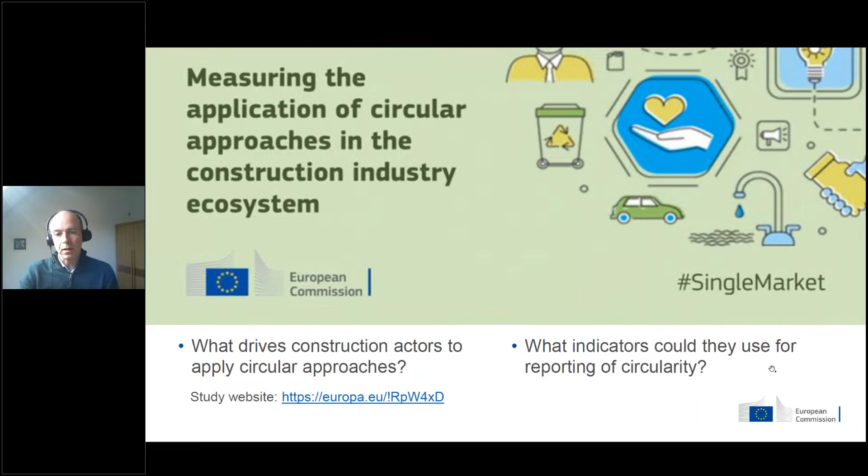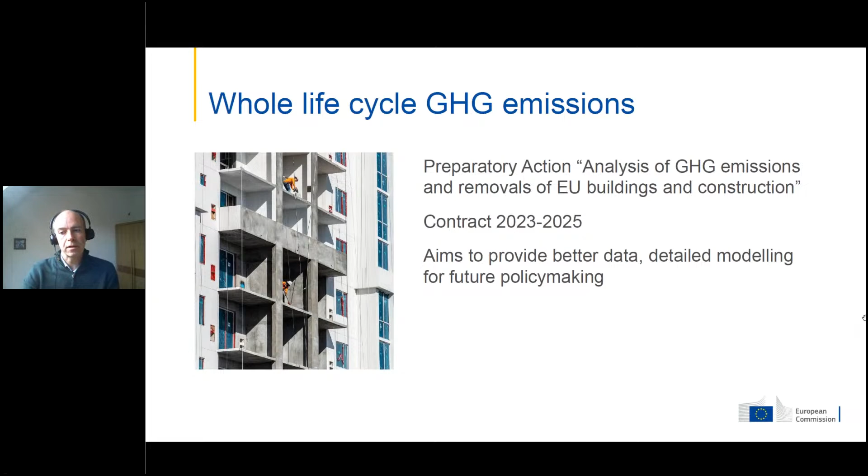We also have a new large study or preparatory action on the analysis of greenhouse gas emissions and carbon removals related to the whole EU building stock. This project will run until 2025 and will give us unprecedented data on the whole life cycle emissions of construction, looking at the trajectories each member state could take to meet climate neutrality in construction and buildings. That one doesn't have a website yet, but work has started recently.

We also have a new study that started recently on end-of-waste criteria for construction and demolition waste. This is the legal definition of when waste stops being waste and starts being a secondary material. End-of-waste criteria exist in certain member states nationally, and at EU level we already have criteria for scrap metal and glass.

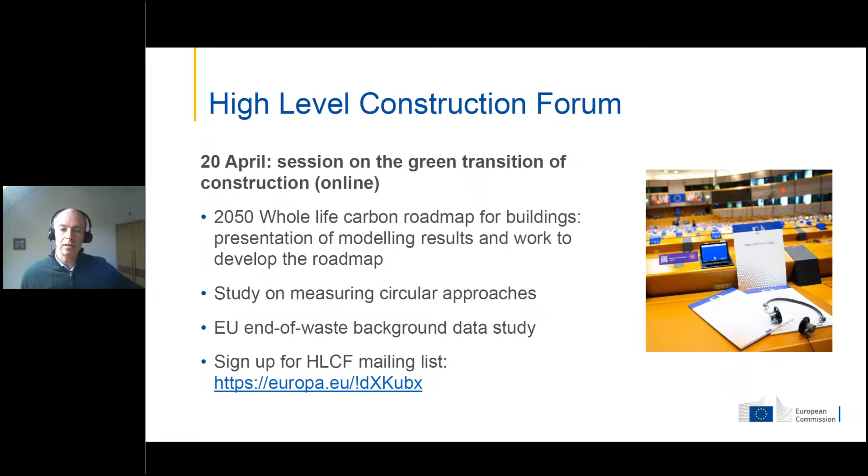We also have, for a few years now, the guidance document, the Construction and Demolition Waste Management Protocol. It's well regarded and widely used, but getting a little old, from 2016. We're looking to update it with a revision starting later this year, continuing into next year, to better take into account the renovation wave and to mention more clearly issues like asbestos, which needs to be tackled in the building stock.

That was my last slide. I can point you to the link on our website, the DG Grow Construction Unit website, where you can see more information on everything I spoke about. I'll be glad to take any questions, or I'll listen later on from the rest of the event.